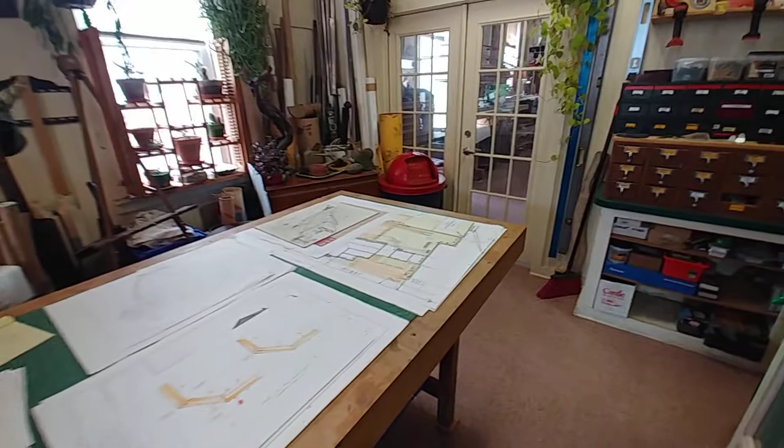What's up, everybody? Kind of a dreary day today. We're in the studio. This is someday I'll get a flat file or an architect's file.

I kind of actually want to put it under this table so that there's just 3 or 4 drawers on either side that pull out. Anyway, something for large format stuff.

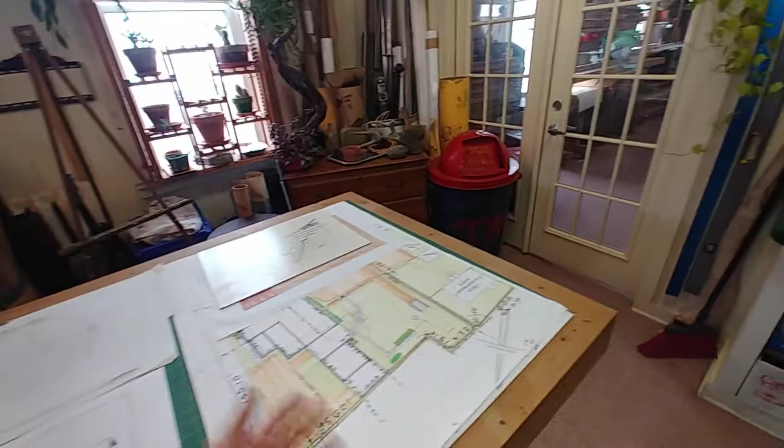We do design/build here, which means I try to work soup to nuts with a customer who has some ideas and help them with their ideas, and then reduce the scope until we've got something manageable, and then fully describe that thing, and then go ahead and make that thing, and hopefully really meet a lot of their requirements for budget and the fun stuff too, of course.

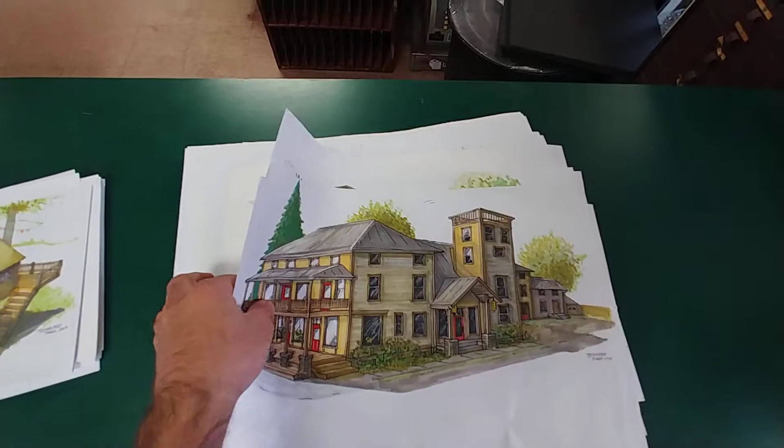So we've got all kinds of things around here. This is my place and plans I've got for the future, hand sketches and drawings and anatomy stuff, and a camper from our portfolio from a few years ago. I do a lot on real paper, or whatever you want to call it.

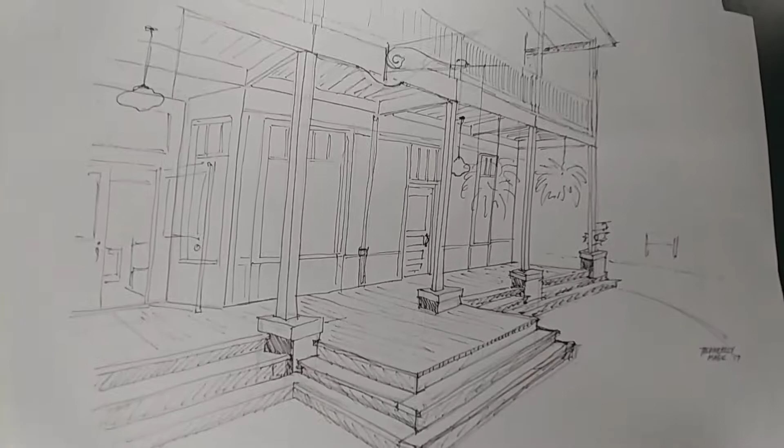Anyway, so this is the deck that comes after this deck. So this year we're going to look at 2 giant decks. Oh, here's a thrust, it would be kind of called, for the porch out front that would allow us to have like a table for dinner with friends. So anything that kind of comes to mind, I sketch out.

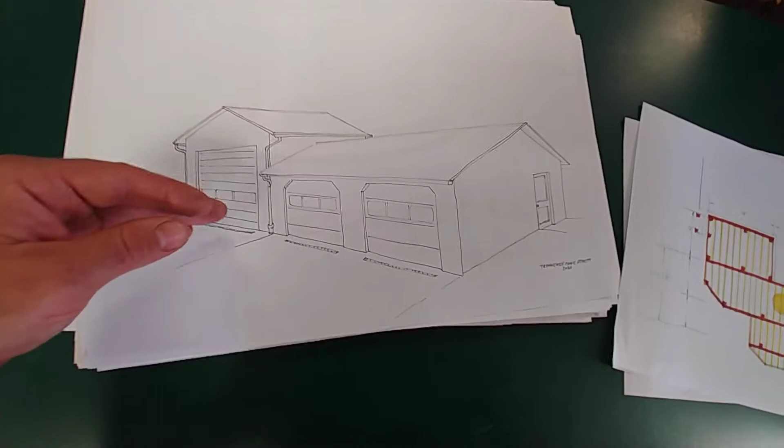Here's a friend's building here that exists, to this point. So the conversation comes up like, oh, I'd love to, as you're kind of standing there, kind of go this direction. We'd go higher. The gable would go the other direction. I could put a car lift in there. The door could be larger, and yada yada.

So given that, this is what he's got for a building. So I do this much more and give you a sense within a few minutes, really, of what you're going to be talking about, so that everybody's visualizing the same thing.

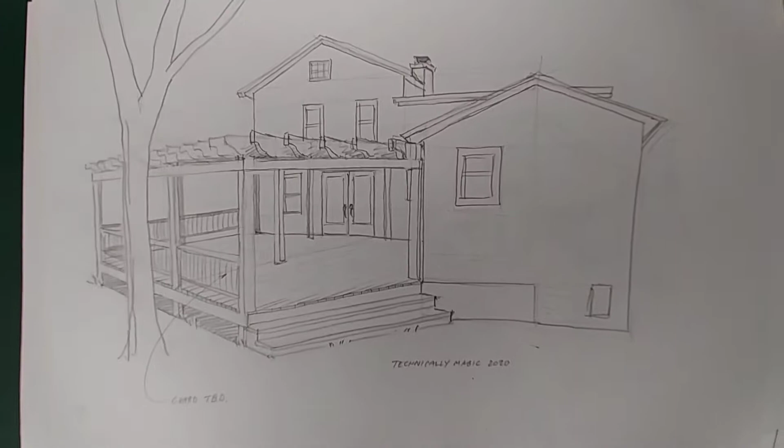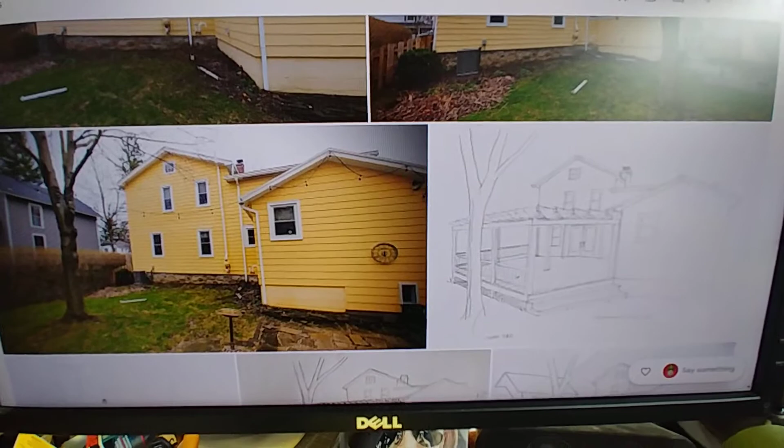So here's the deck and the way that it started. Let's go back to the computer so we can look at the whole project. This is our production value here. We've been to the site already. I think we poked our heads out into the backyard. So generally speaking, this is what it looks like.

There's the tree and the old stone foundation, and you enter, kind of the yard here. And so we thought, well, you go up and on, and then she wants to put French doors in the house here. So, coming out from inside, or this is sort of the loop for traffic.

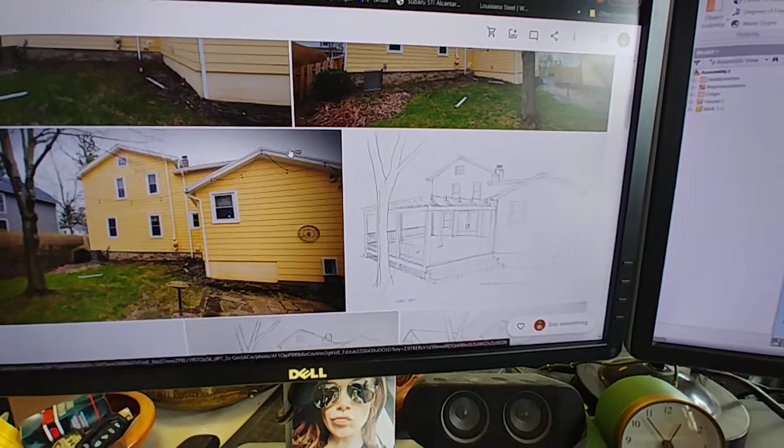So this was actually carried over from 2020. This has been a year. These photos are more than a year old, from March 2020. We were looking at doing this then, and we've kind of hit pause, and now we're back.

So it's exciting to finally get this stuff here.

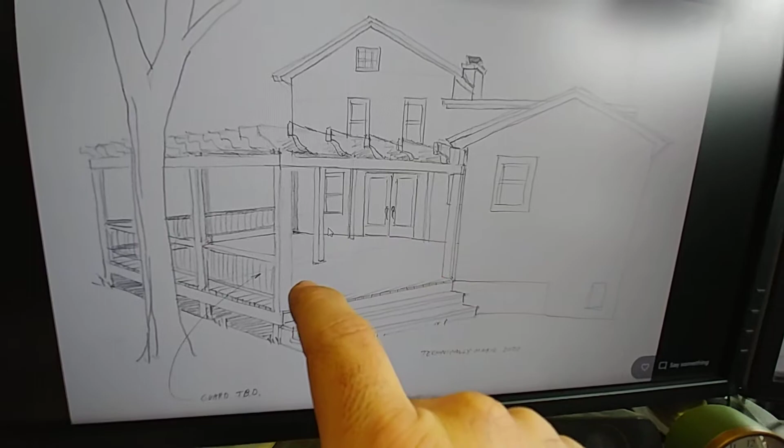Here's the first direction we took, like I was talking about, entering, coming up, 2 kind of joist bays, a carrying beam kind of planar with the face of this gable end here, and joists toward the house, as well as joists out to a second beam here with a dog-eared corner.

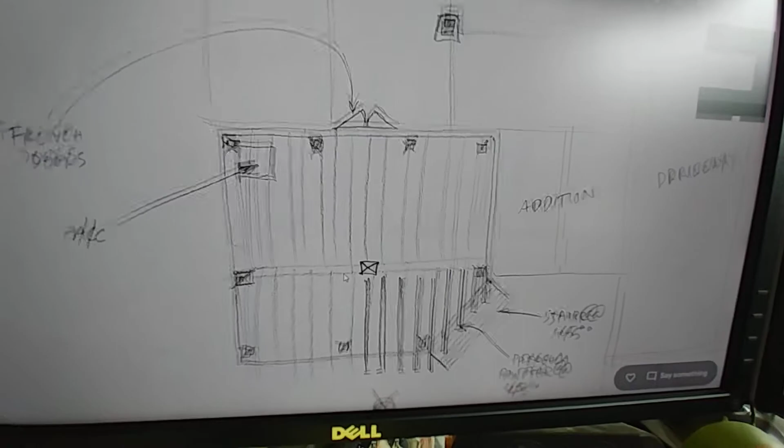And so from above, I think this is what we're talking here. How would that work? And generally speaking, the size and the number of posts. And just to get to a rough number, these are things that we can quickly do by hand.

Then we sort of changed it, and I started to incorporate the tree. Once again, bring the deck fully out flush with this gable, but we were half as far with the posts for the pergola. So kind of a reduced size pergola, kind of tippy toes in the water as far as how much. Actually, for the money, the size of a pergola can be pretty enormous.

All this will be rough sawn larch from Farmer John, in the middle of nowhere. He's got a great price for that.

So anyway, we started by being conservative here, and it ended up getting pretty liberal. But the biggest conversation point in this conversation was, let's curve this outer edge. That'd be pretty cool. Incorporate the tree.

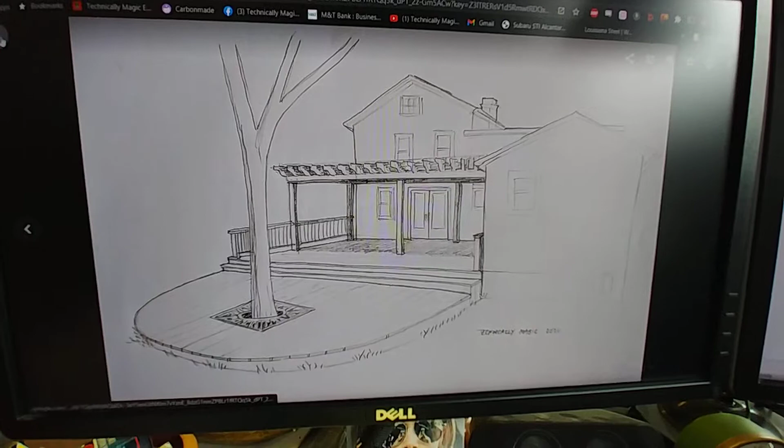I can get those cast iron 2-part finishing tree grates at a place in Buffalo. And wouldn't this be cool? Full width stairs. Like she had seen that deck that I think maybe the end screen on these videos pointed to the other deck from a few years ago that I constructed. So that had full width stairs, like the wedding cake style, basically.

And then I added some items in the background here to round out the views. These are our videos and stuff that are yet to come, and we've already tore the wall apart. But now we're down to more like this here.

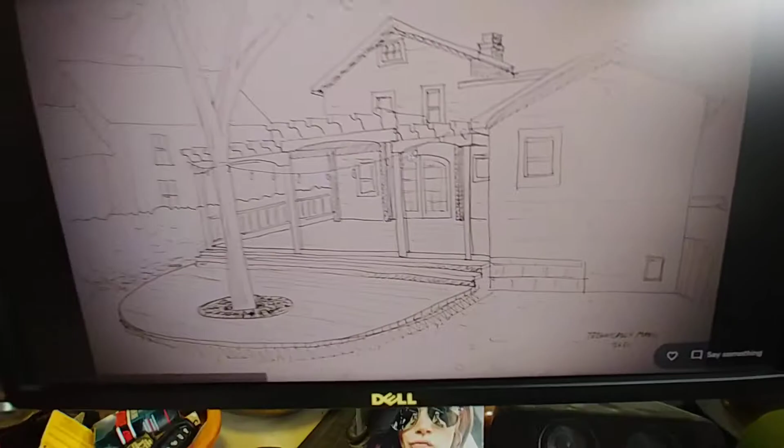And so we've got the ability to show the door that we actually bought, which we'll go and look at, which is enormous, and $6,500. But it was an error, so we got it for $4,000 delivered out the door with a full warranty. It's brand new. It has a small blemish that we'll look at, which is basically well worth the price adjustment. It's like 35% off or something.

Excellent, wonderful quality. Three-dimensional grids on both sides will all be like in keeping here with the arched top. It's one of the coolest things that happen, and we wouldn't have shown that here before because we wouldn't necessarily have jumped in on a $6,000 or $7,000 door before.

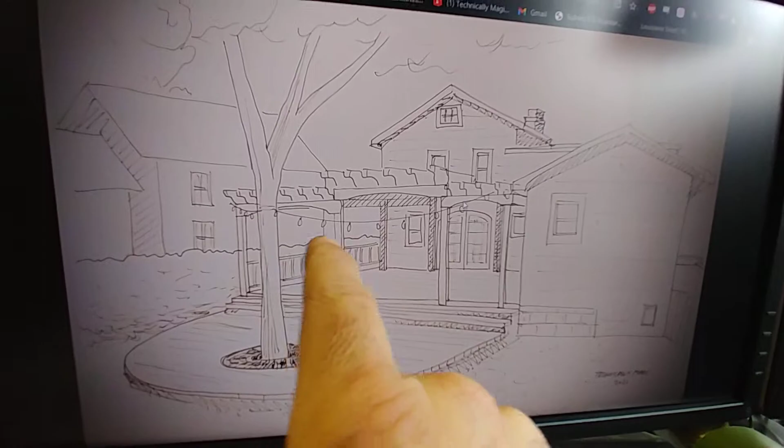But I believe that arch is going to inform a lot more about this project, and we're going to bring in that arc into the pergola beams here on the front. We may take them back in on either side of the lane that goes back to the door. The center lane has a higher top than either side, which informs traffic flow and implies a reprieve, or an area for furniture to collect, helps feng shui kind of happen.

And you maintain, and you can bring in a light feature here or a couple of these string lights, up and above. You've got the ability to put signage or monogram stuff over the door, and everything kind of starts to fall into place.

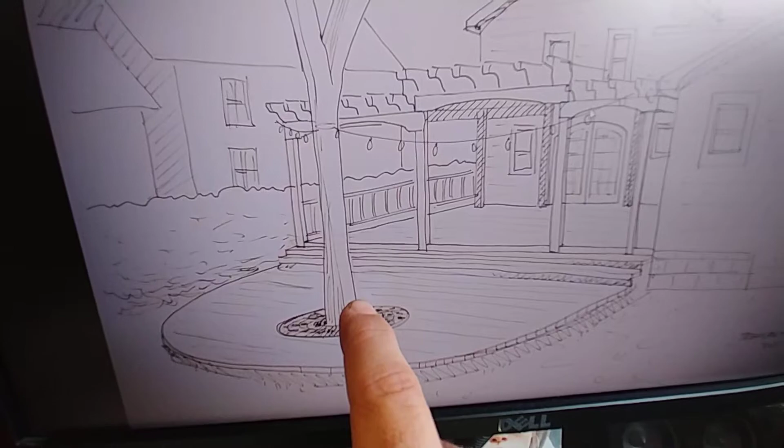The curved lower section here, I'm still showing that, which I believe we're going to do, but I've taken the corners off of the cast iron grill or grate. That further customizes it and makes it more of a coaxial kind of drip ripples forms happening here. We've got the tree itself, then the grate itself, then the arc around that, and then we've got arcs in here and arcs in there.

Things start to collect speed and roll downhill, which is cool. Not to be confused with shit rolling downhill, because this is a very pricey project with a very high level of craftsmanship. That's the plan.

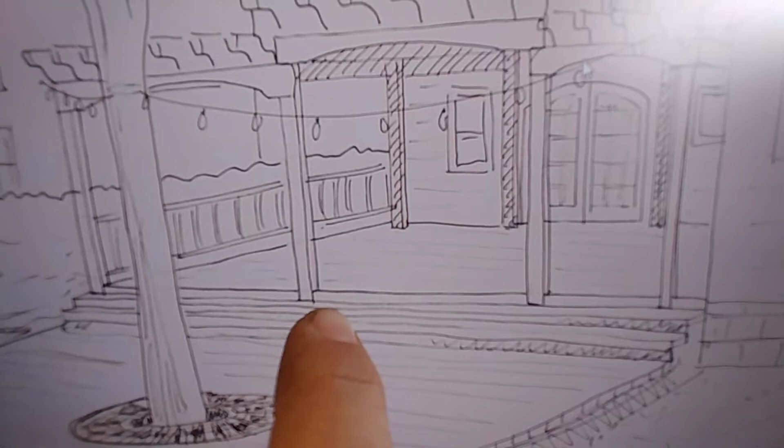I liked pulling the posts out, so basically the beam - you have a choice here to put the beam on our side of these posts or on the far side of these posts, whether you laminate it on with the correct hardware or you notch it in.

I'm going to put it on the far side of the post, which allows the back side of it, the side facing us, to be essentially the face of this first step. But that also means the post itself will cut through that first step and appear to land on the second step down. But that divides these openings in a nice finished way, and it involves a visual cope, a three-dimensional visual cope all the way around the end of that post rather than just flat.

And I think that I love the full width stairs, but they get to be a little redundant back here. And obviously it's greater than 20 feet, so I've got to start - where's my sketches for that?

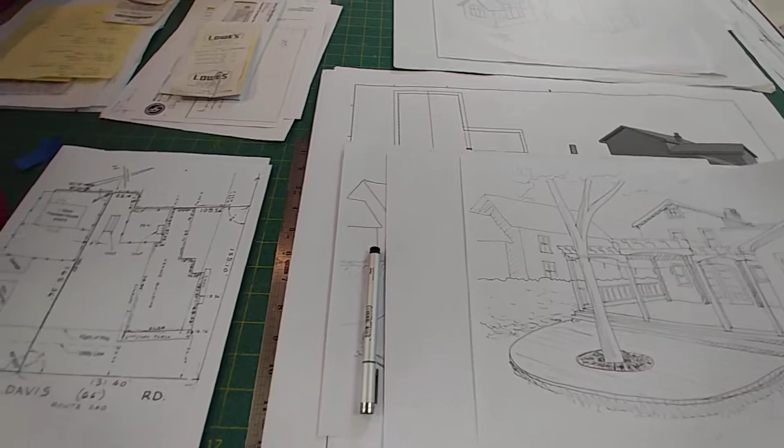So then I have to start scarfing - this is that drawing itself, come on, now here it is. Then I've got to start scarfing the appearance boards across the front to make one smooth plane. These are actually back a whole joist space, so it would be like this but nearer, but still a flat bottom that appears to die into the surface of the deck boards.

So anyway, over here, I'm really making a mountain out of a molehill here. But this is what you get out of forethought.

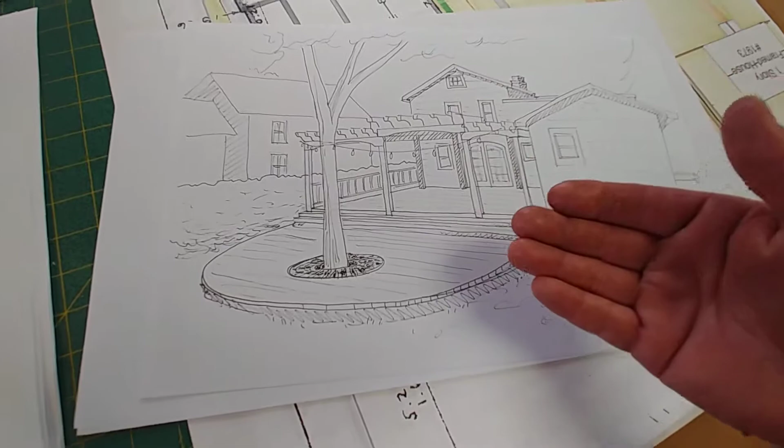Will it look like that? Or will it look like this, but a bit closer, or even like this where it's further away? These are nuanced things. It still is kind of the same number of posts. It's essentially just about the same amount of work, but it entirely changes the scene here. So I think this is even further down the road toward what we were headed to do.

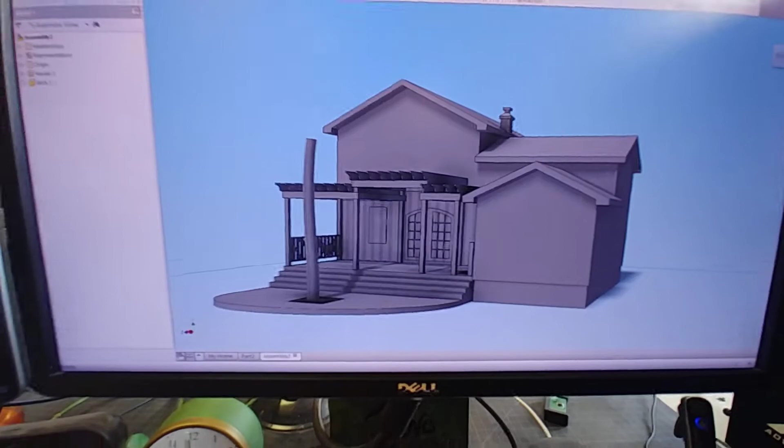Here is our model, which is a next level to the process. This allows us to be scale accurate. So I did a field measure of the house, and I laid out what we had for a plan here. This doesn't show the posts as I described.

This is like the alternative, like I'm talking about. Just fine, certainly nothing wrong with that. I may have seen something like that and gone, oh cool, but missed an opportunity to get that to pop out through the face of this stair. And a lot of people would say it looks great as is. It does, it does look great as it is.

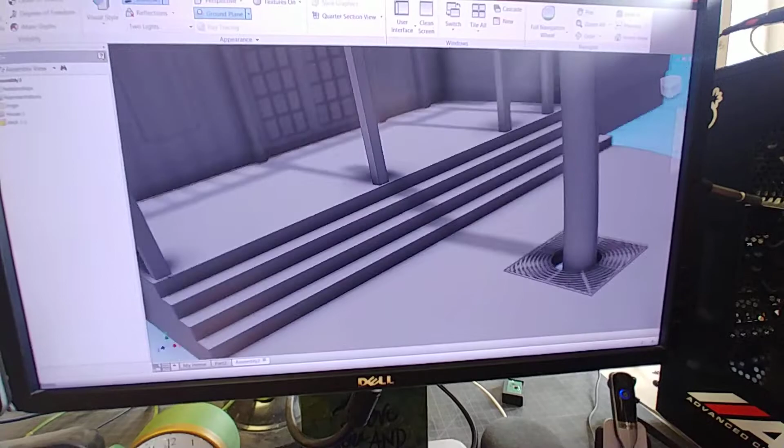I like it the other way for this project. So things like that can come from being able to see things in real life.

I'm not exactly sure, I think we're having a failure here. I didn't build it exactly centered on the tree because in the end we're probably not - it's difficult, the tree isn't circular. We'll be closer than that, obviously.

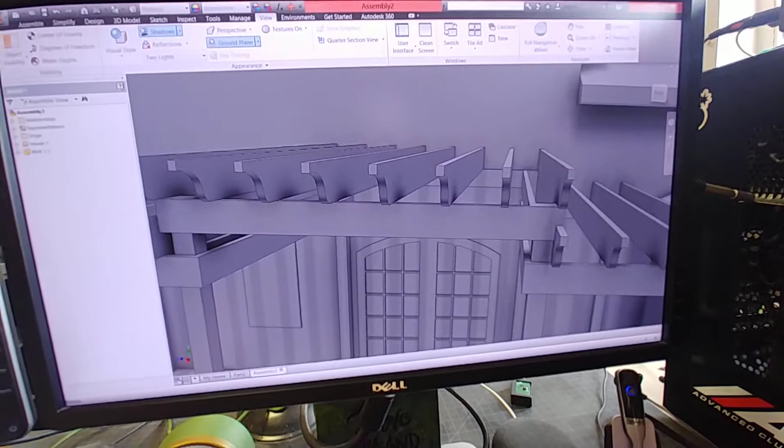But we've got a raised section here. I haven't scalloped the beam. Things like that don't go into the model because it's paid time, and I know I'm going to do it.

If it really works out when the time comes and we like it, we'll come back and do it to the model. We'll look at the model and make a yay or nay decision, and we'll go from there.

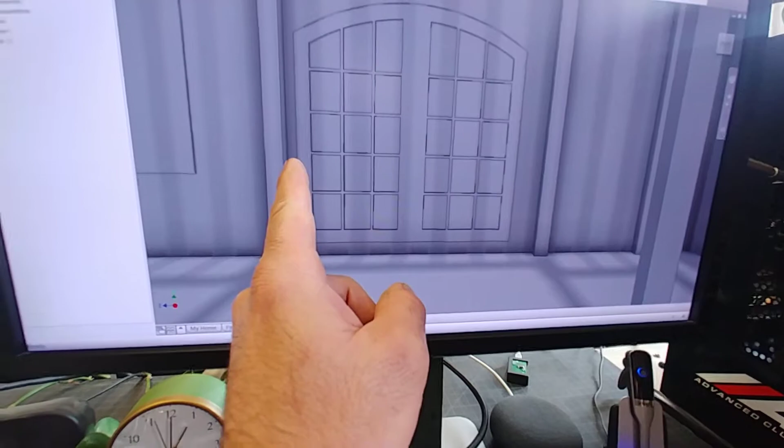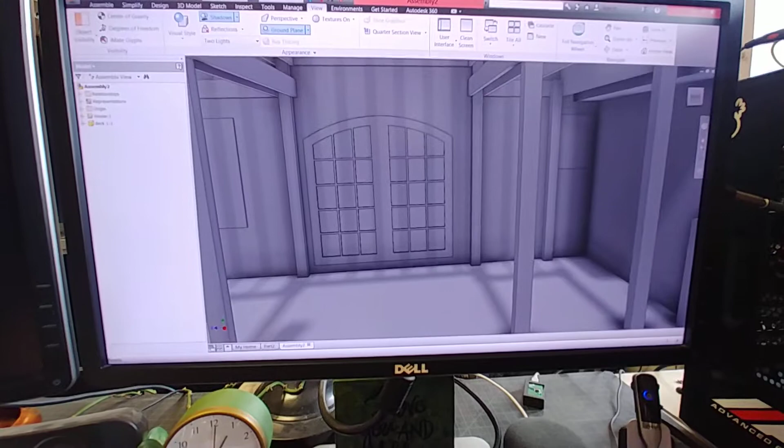It'll also be centered. Here's another kind of pitfall - I don't want to see this happen. I don't want far less reveal to the left of the door than the right, or vice versa. That's where we'll talk in the coming video about getting this just right, making a commitment to the door and then to drilling our posts so something like this doesn't happen. You can see what a failure that would be for a grand entrance - everything just takes a shit on you when it's like, what happened? What was the problem there?

We've got to clear this eave - there's a gutter in here and stuff, so we don't want to get anywhere near there. That pushes our post location to there, and we have this weird area here, where this entire corner would have been cantilevered - our carrying beam coming out this way, and our rim joist that way. It's quite a big cantilever, all things considered.

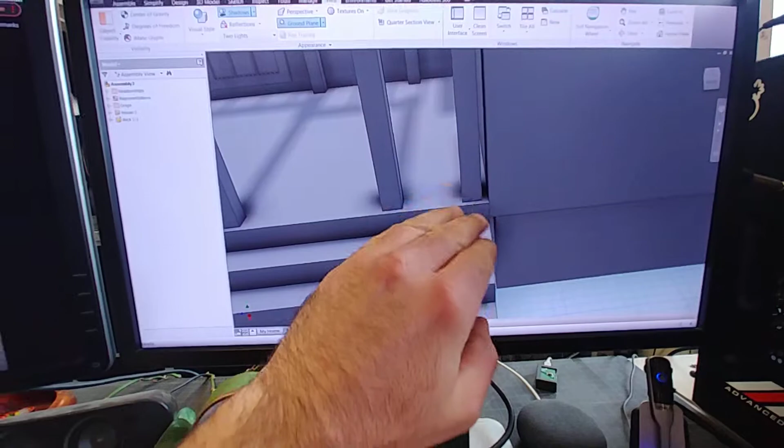So we'll end up with a post there, and I don't need a 20-footer like the rest of these - these are 16s and these are 20s. I can use an 8, because he'll be a little too long and we'll cut him down, and put a small section of guardrail through there, and it'll go with whatever we do here.

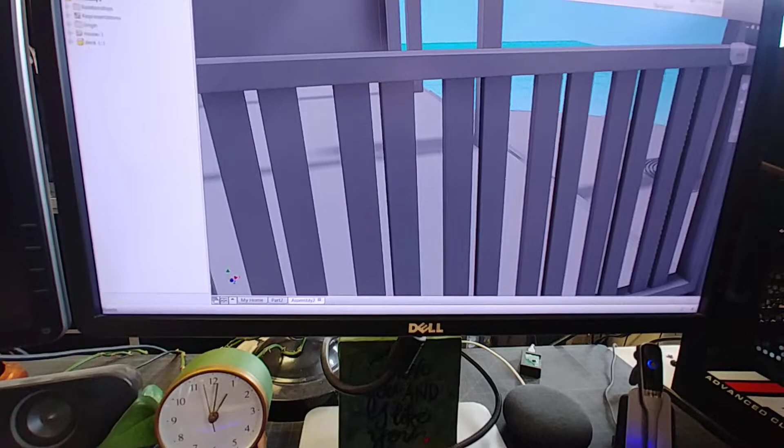This is kind of a craftsman thing right now. Not sure, but it's a bit heavy and asymmetrical to have such a long section of guard, which you absolutely need there. There isn't room to cascade the stairs down and go anywhere meaningful, so you kind of have to do it that way. To meet code, you've got to have a guard there, but there's just nothing here.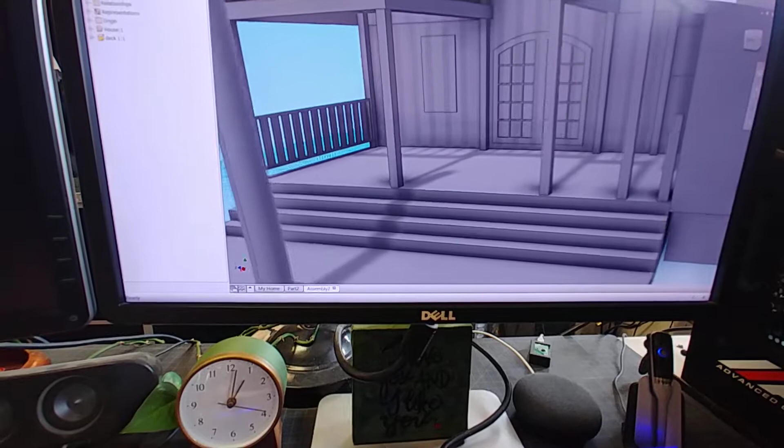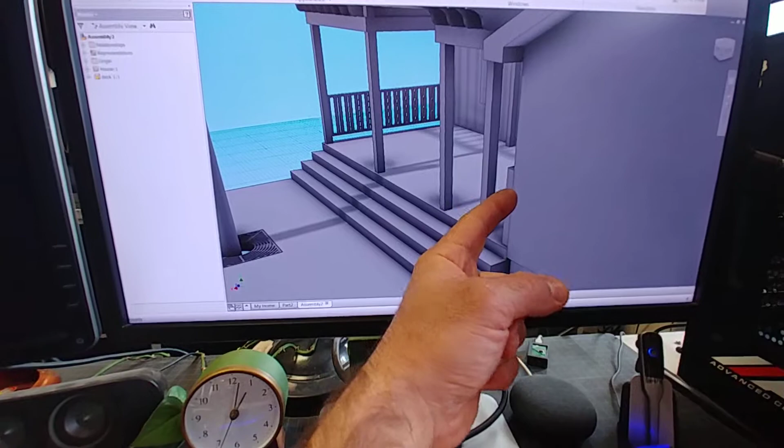As you can see, this is a bit funky in a funky kind of way - it's heavy on the left as a result of all those physical details. A small piece of that here kind of helps us balance that. Then we may take off with a little stub handrail, just a boop and a boop, maybe even one or two there, or maybe just two in the center because that's where most of the traffic is.

Who knows here. But these are things that aren't worth modeling right now until we get to the point where we really want to look at it and make a decision - but then we can be sure of what we're talking about in real life because the scale is correct.

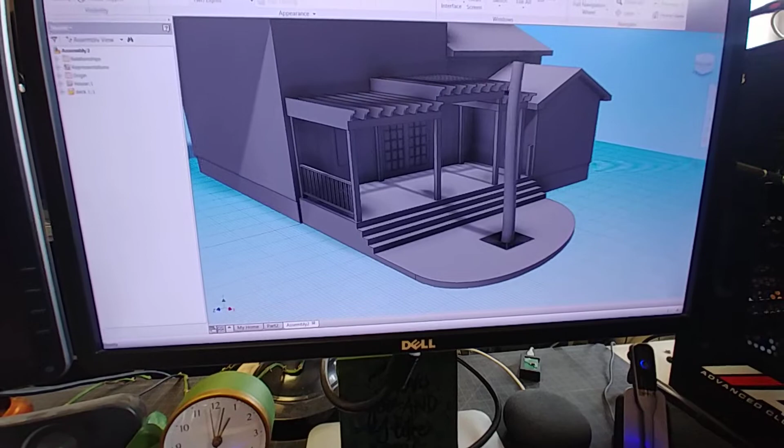I can make all kinds of drawing views of this, break it out, and look at the exact stud layout. If I have funny angles or curves, I can start to be technical and translate those to the real world to make things meet up. If I need to know how long a piece to bend, rather than pulling a string around what I've got out here, I can get a measurement of that curve and figure out - that straightens out to 20 feet, or it's greater, so I'll have to do it in a couple of pieces. It's a nice way of gaining information about what you plan to build so you can do a good job of it.

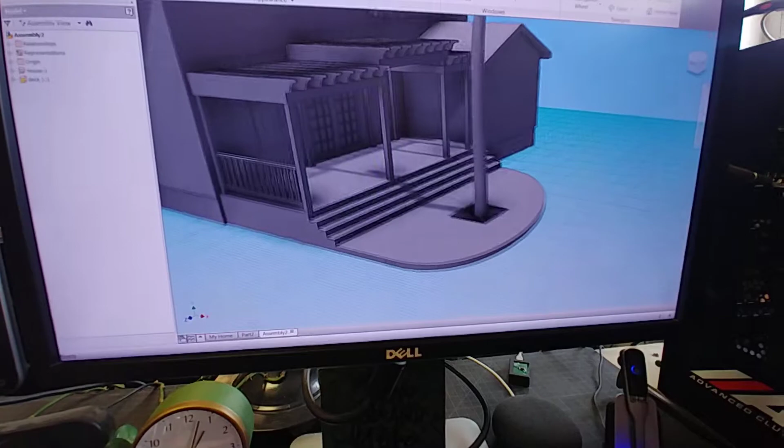This is just Autodesk Inventor, which is a mechanical program. It's a bit of a stretch to use it for architectural things, but not too much.

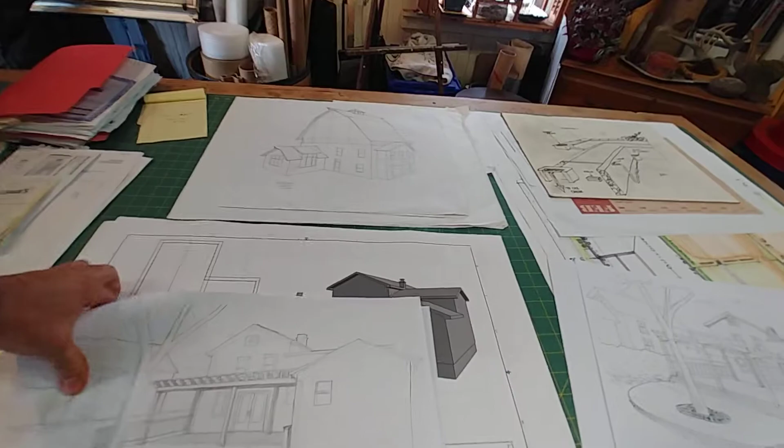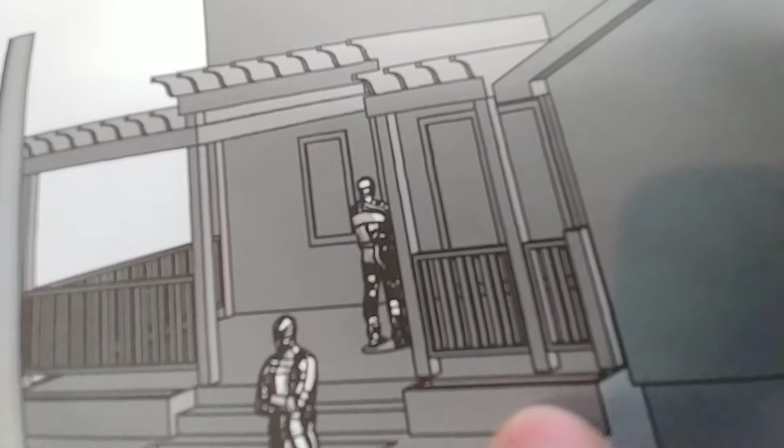Somewhere in here there was an earlier version I glossed over - oh, on the CAD drawings, I guess I only produced it in CAD. There was a point at which we didn't carry the stairs all the way across. We were talking about, at an earlier version, after I'd done a model, having bench seating here to the left and right, and behind that a built-in planter that would just get a plastic container down in there to hold the dirt. You'd really only have stairs here, and much more guard to either side.

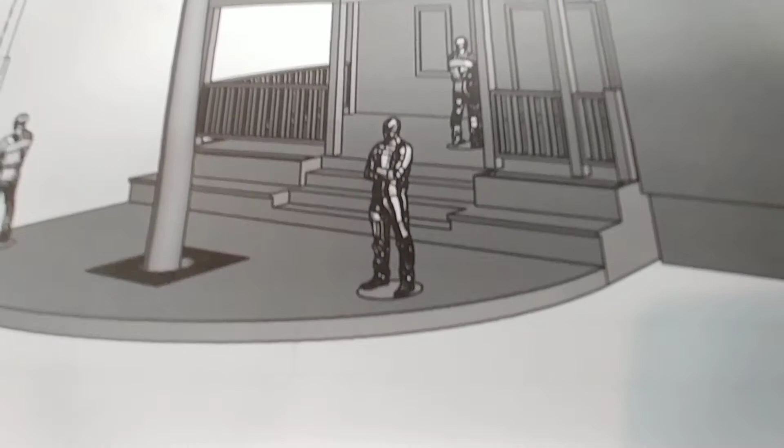We've done a fair amount of messing around here trying to decide on what we're going to do. So let's go over to the site itself - we'll check out that door, break ground, open up the wall, and start talking about making all these things jive so it looks a lot better than the model when we get to the real thing. Thanks for watching, we'll see you.